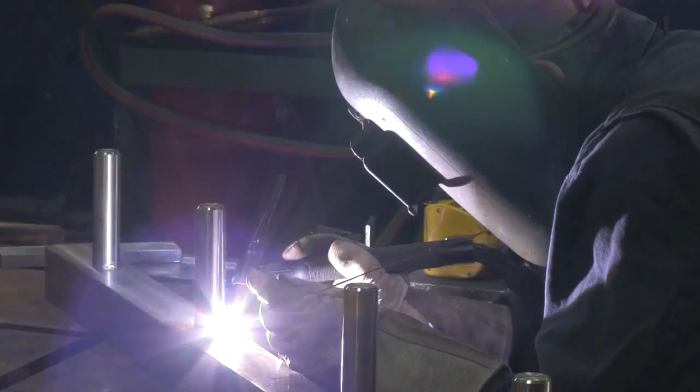Hello, and thank you for attending this webinar created by the CWB Group in order to familiarize the listener with the latest of CSA W47.1 Certification of Companies for Fusion Welding of Steel. This presentation has been divided into two parts in order to facilitate later review by the listener.

The agenda for this webinar is as follows: an overview of the release history of CSA W47.1, the development process of the latest version of W47.1, value of certification to the welding industry, introduction to Update 7, a summary and review of major changes contained in Update 7, details of the timeline for transition to the new requirements of Update 7, how to acquire a copy of Update 7, and where to direct your questions.

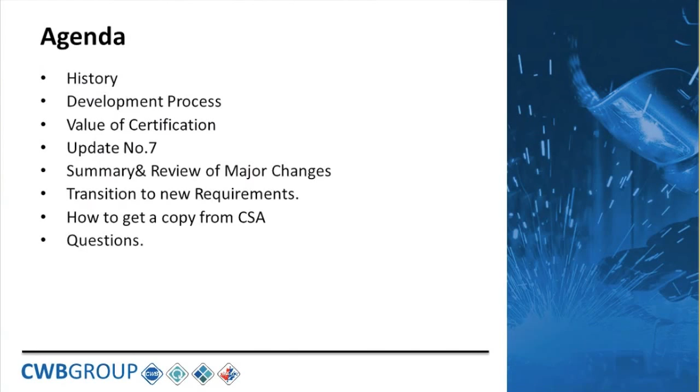The 7th edition of CSA W47.1 Certification of Companies for Fusion Welding of Steel was released in 2009. It supersedes the previous versions published in 2003, 1992, 1983, 1973, 1947, and 1938. The current revision is W47.1-09, reaffirmed 2014, published as Update 7.

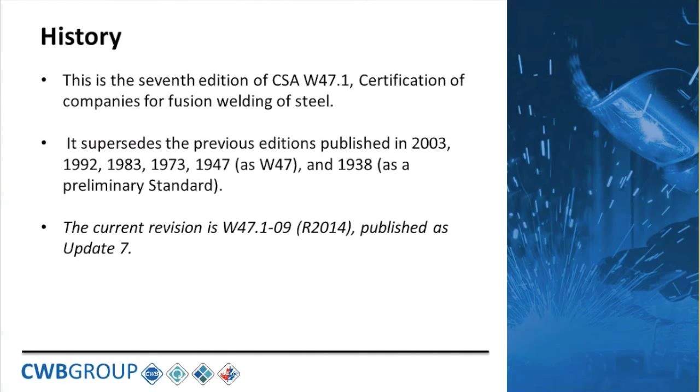The latest revision of W47.1, referred to as Update 7, was developed by the technical committee made up of volunteers representing varied viewpoints and interests to achieve consensus and develop the standard. The mandate of the technical committee is to ensure that this standard meets the needs of the users and specifiers, and that the requirements meet national regulatory requirements as well as meet or exceed similar international and/or competing standards.

The latest revisions were made to correct or clarify issues that had been identified in the previous version of the standard and to introduce requirements that ensure it remains relevant on the national and international stage. It should be noted that the Canadian Welding Bureau is the administrator and not the writer of the standard.

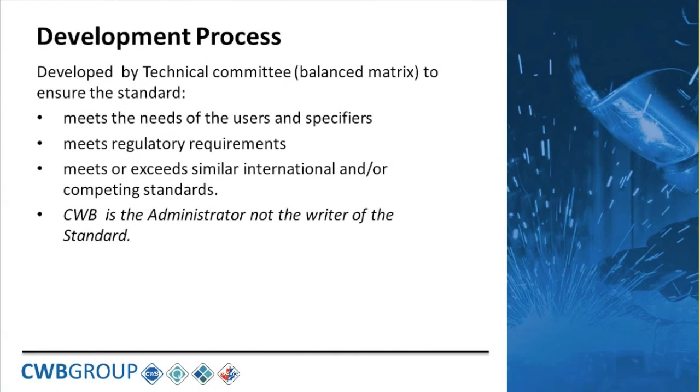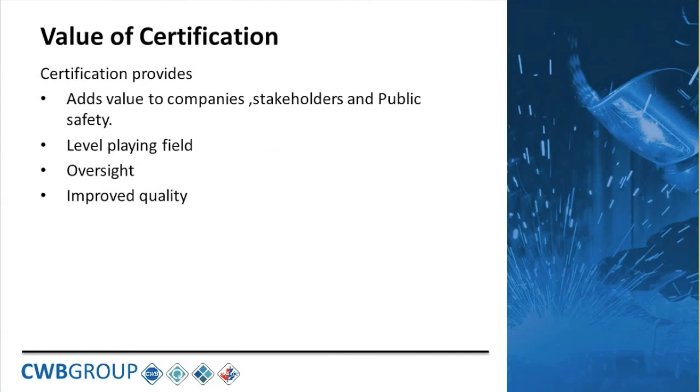Certification to W47.1 provides value to many stakeholders in the welding industry as well as public safety. Certification provides a set of guidelines and requirements that must be met by all certified companies, creating a level playing field for these companies. CWB certification also provides third-party oversight, which is quite unique among certification regimes and provides improved quality. Improved quality is also attained through the fabrication requirements, such as the need for independent CWB approval of welding procedures and the qualification of welding engineers, welding supervisors, and welding staff performed by CWB.

Within the pages of W47.1 Update 7, the reader will find the delta symbol in the margin of the standard denoting where a revision or additional and/or new clause is present. Multiple clauses have been revised and several new clauses and annexes have been added to provide details and informative clarification of the new requirements.

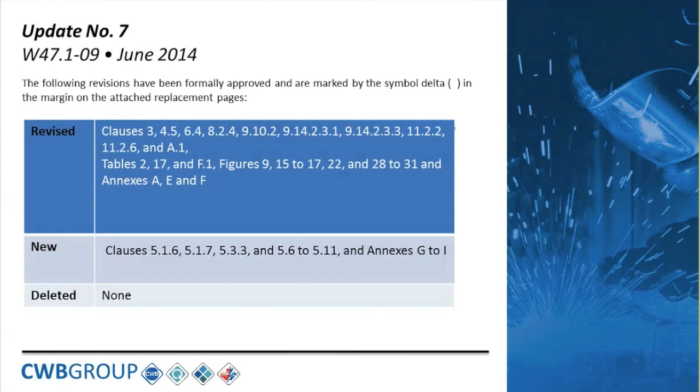Some of the major changes that W47.1 Update 7 brings forward are as listed here. The standard is now specific regarding where audits take place. The standard now requires that companies have a system for handling incoming complaints. The standard now contains changes to welding engineer requirements and provides specific examples of the type of experience required. The use of side bends for flux cored arc welding, metal cored arc welding, and submerged arc welding has been discontinued.

The standard now specifically includes the need for a certified company to meet weld quality requirements. The standard now includes the need for a review of welding-related requirements as well as technical review prior to commencing a project. The standard also includes specific requirements for equipment, inspection and testing, non-conformances and corrective actions, identification and traceability, and quality records. We'll explore and elaborate on these changes during this presentation.

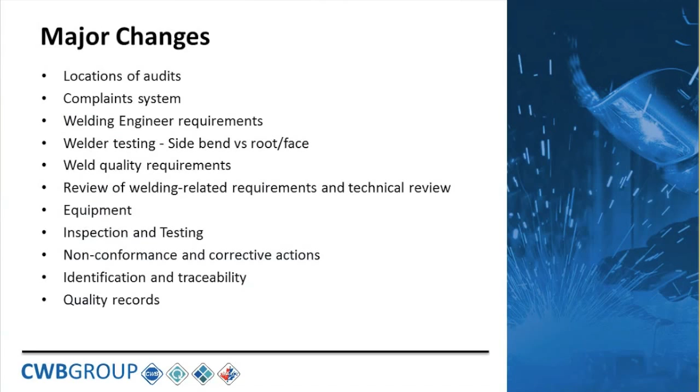Location of audit. Clause 4.5 applies to companies that are currently certified. The clause has been updated to include the need for CWB to perform its verifications, also known as audits, at the locations where welding is being performed by the company. Clause 4.5 states, certification shall continue in effect, subject to periodic verification by the Bureau that the requirements of the standard are being met. Such verifications shall take place at the locations where welding is being performed by the company.

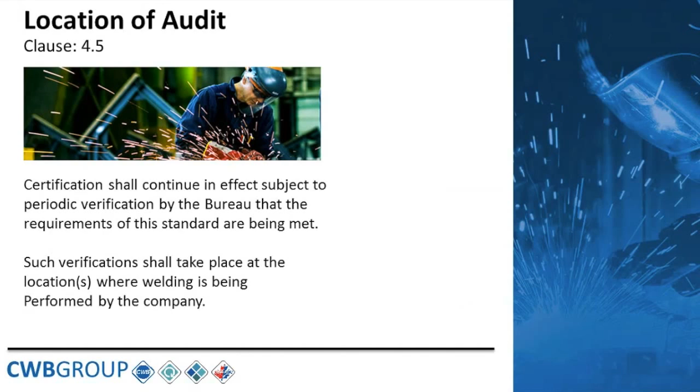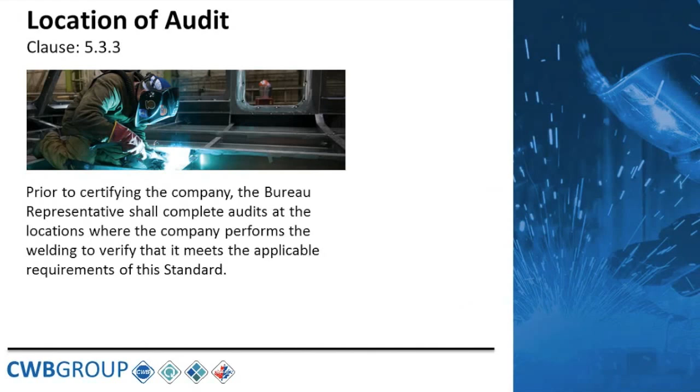Clause 5.3.3 applies to companies that are applicants and are wishing to become certified. Clause 5.3.3 states, prior to certifying the company, the Bureau representative shall complete audits at the locations where the company performs the welding to verify that it meets the applicable requirements of this standard.

Conducting audits at job sites will ensure all aspects of certification are verified, specifically workmanship, which provides value to the audits, and other value-added services to the certified companies, including opportunities for improvement. Certification audits conducted at locations where welding is being performed will verify the company has the capability to provide services intended by the standard. This location can be the certified fabrication shop or a field site where welding is performed on behalf of the certified location.

Meeting this requirement will require some planning between the company representative and the Bureau representative. It should be noted that due to the dynamic nature of the welding industry, it is not necessarily required that actual welding be taking place at the time of the audit, but simply that the location is a job site conducive to providing the CWB representative and the company a means to demonstrate and verify that the company possesses the capability to meet the requirement of the standard.

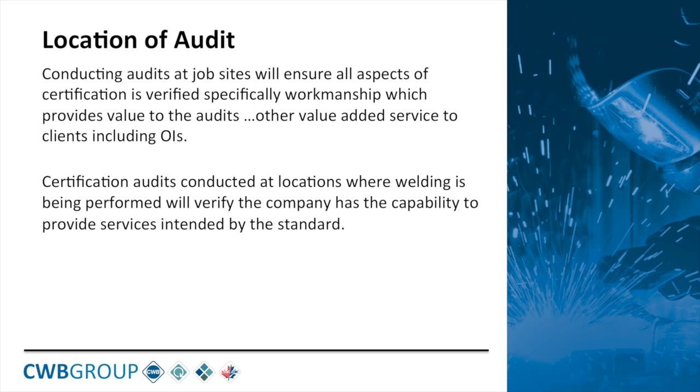Complaint system. Update 7 now includes the requirement for a company to maintain records of any incoming complaints made to the company relating to its compliance with certification. These complaints are typically from an external source such as a client or an inspector representing the client and can vary greatly but relate to the certification requirements. Furthermore, the company is required to take appropriate action in regards to the complaints and document the action taken. This is generally good business practice and allows the company to maintain traceability that any complaints were addressed, as well as track trends in order to improve processes.

Clause 5.1.7 states, certified companies shall keep a record of all complaints made known to it relating to compliance with certification requirements. Certified companies shall take appropriate action with respect to such complaints and shall document the actions taken.

Welding engineer. Clause 6.4 now includes an additional option for a welding engineer to demonstrate knowledge of the subjects related to the welding of steel. This additional option is addressed as follows. A certification or qualification granted by other recognized organizations. This includes the International Welding Engineer Diploma issued by the International Institute of Welding.

Furthermore, the standard now provides specific examples of what is considered to be welding-related experience. Here are the provided examples: welding inspection, welding supervision, weld testing, weld designing or detailing, welding instruction, fabrication planning, manual, semi-automatic, mechanized, or automatic welding, and welding procedure development and testing.

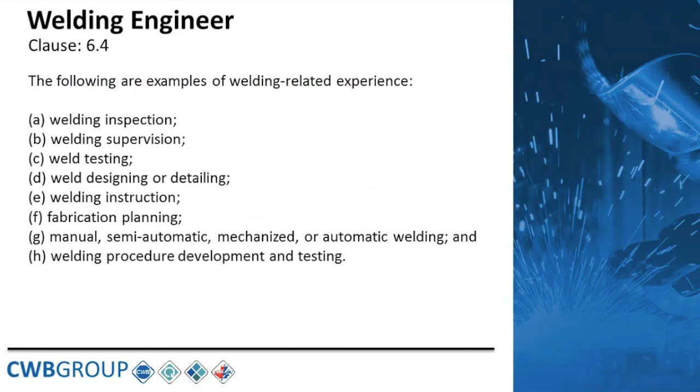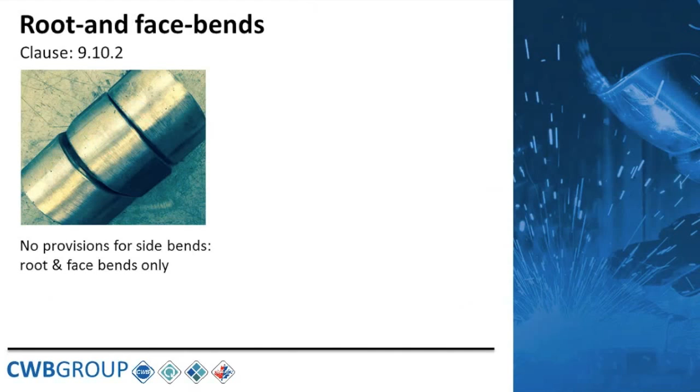Update 7 does not contain provisions for the qualification of welders using side bends. All welder or operator test assemblies for flux cored arc welding, metal cored arc welding, and submerged arc welding are to be radiographed. If the welder or operator is utilizing a flux cored or metal cored electrode with a diameter of 1.6 millimeters or less, the test assembly shown in Figure 8 may be used, and therefore root and face bends can be performed.

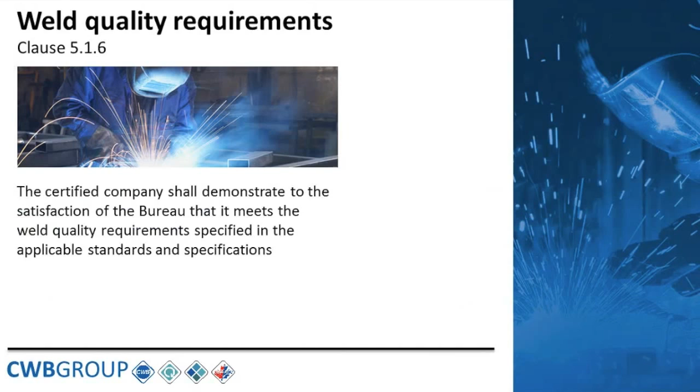Weld quality requirements. Clause 5.1.6 states, the certified company shall demonstrate to the satisfaction of the Bureau that it meets the weld quality requirements specified in the applicable standards and specifications. The applicable standard is the standard that the company is working to, as defined by the product or design standard and/or their client and/or their internal specifications. This would typically be CSA W59, but could be other standards.

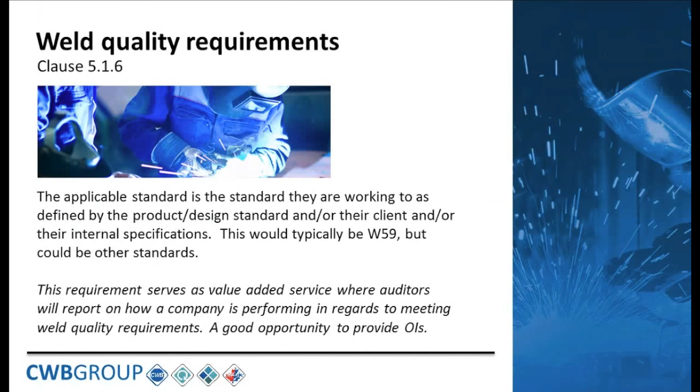This requirement serves as value-added service where auditors will report on how a company is performing in regards to meeting weld quality requirements. This is a great chance to provide opportunities for improvement.

This concludes Part 1 of our webinar. Please continue with Part 2 as we'll continue our summary and review of the major changes contained in CSA W47.1 Update 7. Thank you for listening.